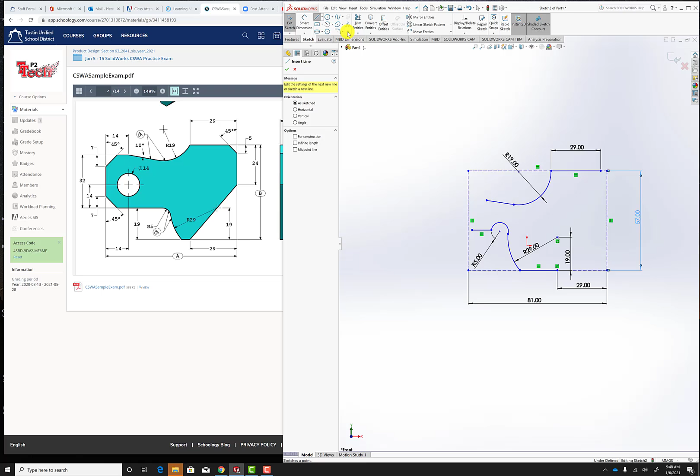Then I can start putting other points down. You'll notice that the diagonal line over here starts at 24 down. So if I put a point - points don't really matter where you put them - I can go ahead and put a point on the edge of the part, since that's as far as it goes.

And I'm going to dimension it from here to here, and it's supposed to be 24, so I'll say 24. Now I know that point is going to be able to take me from here to here, and that should be correct.

So now that also sets me up for the next one. I'm going to put another point in here and dimension it with 5 from the top. So I go 1, 2, and I'm going to drag it out here, and that's 5 from the top.

So now I can go ahead and make this line connect to that line, connect to that line. It's okay if I overlap my dashed center line, because it's only for construction, only for reference purposes. So I've got my right side kind of set up pretty well.

You'll notice that this particular arc and this one here don't really look alike. And there's something - there's this little symbol on all of the arcs. There's 1, there's 2, and actually there's only 2. This little circle with a line means that you have what is called a tangent relationship.

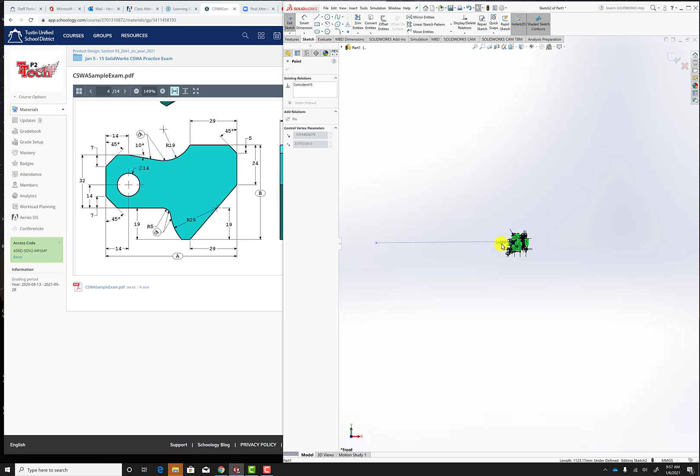All right, so let's see what else we need to do. I do notice that this thing looks a bit low, right? I can drag it up a little bit higher, and I don't know why this guy went all the way out this way. So I need to fix that, that line went nuts. Okay, all right, so that looks a little bit better.

This line is the one that needs to connect to here. All right, so let's continue. I'm going to take this line. I'm going to dimension it from here to here.

Oops, sorry about that. I need to go from here. Why isn't this working? Okay, from here to here, and that should be 32, which is over here on the left. So 32, and that didn't throw anything else off, so that's good. And we can click OK.

So now what I can do is connect this, hit the control key, and do merge. Oh, look at that. That looks pretty cool. So I can move on now to try and find out.

So the length, the distance between here and here is supposed to be 14. All right, and we did that. We have the distance. So now we have this other diagonal line that is going to be going between this one and this line over here, and it is supposed to be 45 degrees as well.

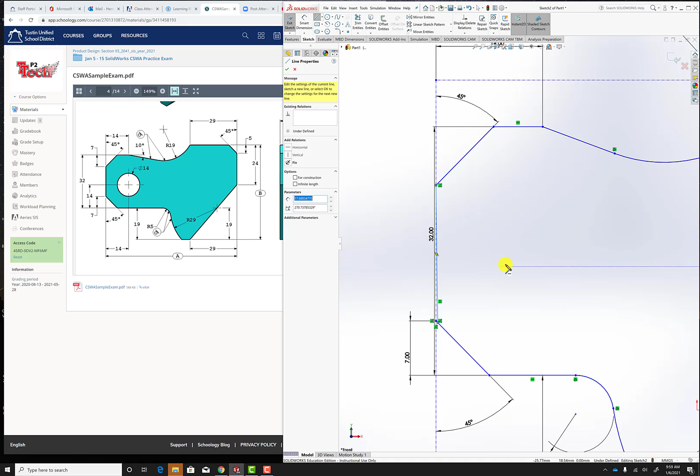So we can select it, get that one, select, go to Smart Dimension, select this, and put that at 45 degrees. And this is almost kind of finishing itself for us. Now we have one last line, and that's going to be this one connecting this one. Oops, I didn't actually connect it.

So if I want to connect them, I want it to be coincident. All right, so I have myself the part. It looks pretty darn good. Let me double check to make sure that I've got all of my dimensions correct.

It looks like I do. I've got my tangent relation. Remember this little circle symbol, and here it is as well, here it is as well, and here it is a third time. So let's do the circle. For the circle, it is 14 from the left and 14 from the bottom.

I'm going to start by just putting in a point, and then I can Smart Dimension that point. So from here to here is 14, and from here to here is 14 as well. Now I can go ahead and draw my circle, and it's 14 millimeters in diameter. So when I do this, I can put in a 7 for the radius. Looks like we're done.

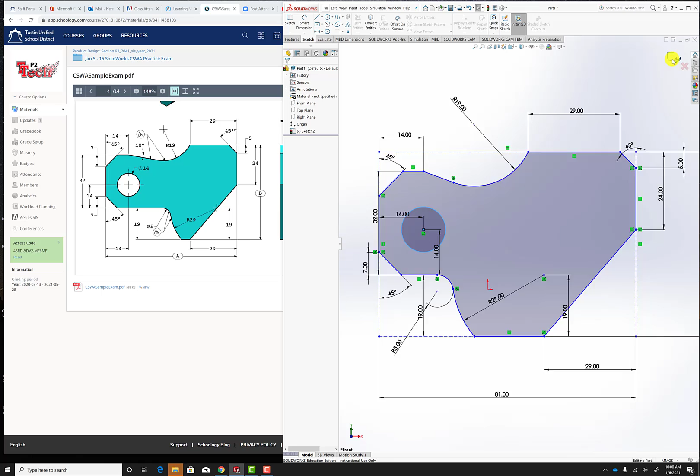So I click OK. Looks good. And I can go back and click on the sketch, and let's go to features. Before I do that, I want to double check what was C. C is 43, and C is the thickness, or the size of our extrusion, right?

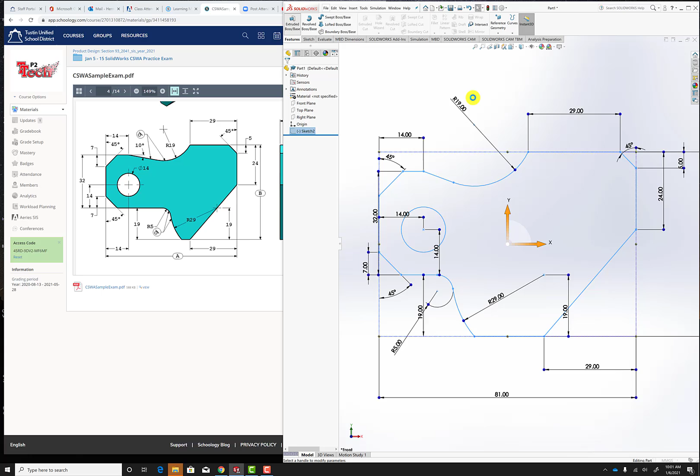So we'll go to features, extrude boss base, and we're going to put in 43, and we have ourselves our part. Cool. So if all things went well, now it tells me to build the part, and it says what is the overall mass of the part.

Okay, well first of all, we need to pick the material. You'll notice up here that the material is not specified. So I need to right click, edit material, and it'll give me a whole list of things. Now this tells me that it is steel, AISI 1020 steel. Okay, so let's look for 1020 steel.

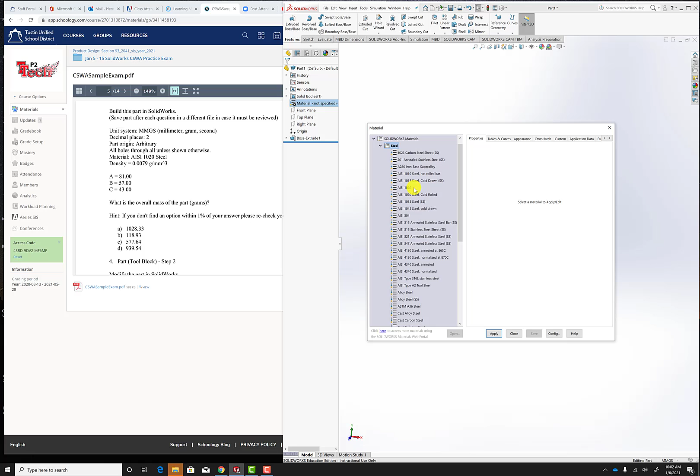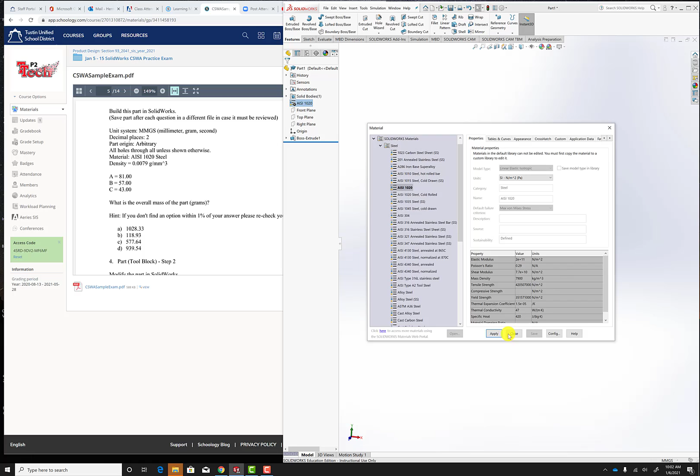I've got alloy steel. Let's see, what do I have? 1020. I have 1023 carbon steel. That's not 1020. Oh, there it is, AISI 1020. So I apply that. Oh, before I do that, let me just double check. The density is 0.0079 grams per cubic millimeter, mass density 7900. Yep, so that looks good. And I apply, close. So now I know that this material is steel.

How do I answer this question? What is the overall mass of the part? So now we go to evaluate, and we go to mass properties, and I'm going to double check. What is mass? It says mass right here, 1050.32.

And according to this, the closest thing that I have is 1028.33. So there is some discrepancy here, but how close is this answer? So I'm going to pull up my calculator on my phone and divide 1028 by 1050. I'm not going to worry about the 0.33 yet. So 1028 divided by 1050, then I multiply it by 100, and I get 98. So I'm within 2%. I'd say that's pretty darn close.

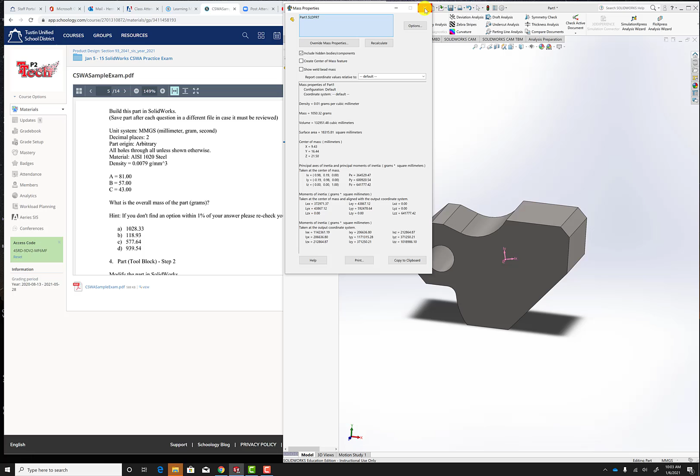I say that the answer is going to be A. Now let's go back, let's go to the answers. Looks like the answer is supposed to be D, 939. So something was wrong.

So I'm going back to the part to figure out what is wrong. It looks like all of my dimensions were correct, and I just found something. You'll notice that this radius here says 29. I didn't realize, I guess I was so eager to finish this, that this thing is really wide compared to this one. Well, the radius is off of this line, and right now I have it kind of in the middle of nowhere.

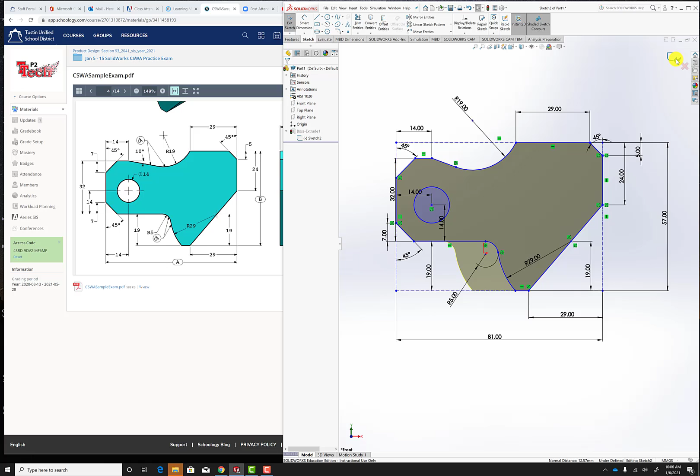So if I go back to editing my sketch and I select that dot, and I control-select that line, and I go to coincident, it moves it over. Look at that. It now looks almost exactly like the example, right?

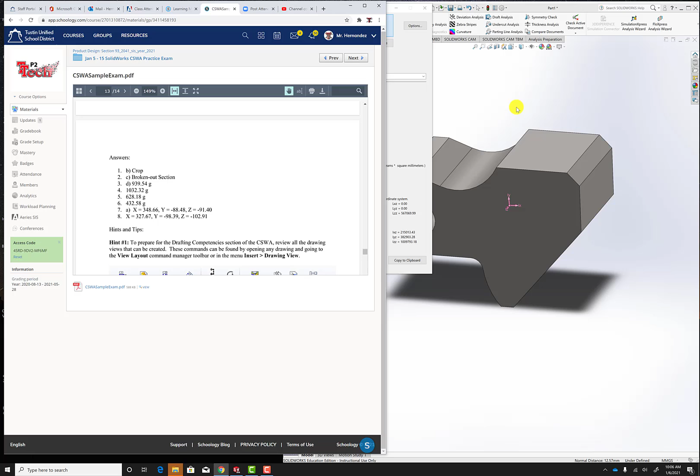So we go back to mass properties, and the mass is 942, and the answer for this was supposed to be 939.5. So we are really, really right on it, and that was the mistake. So one small mistake could have totally thrown me off.

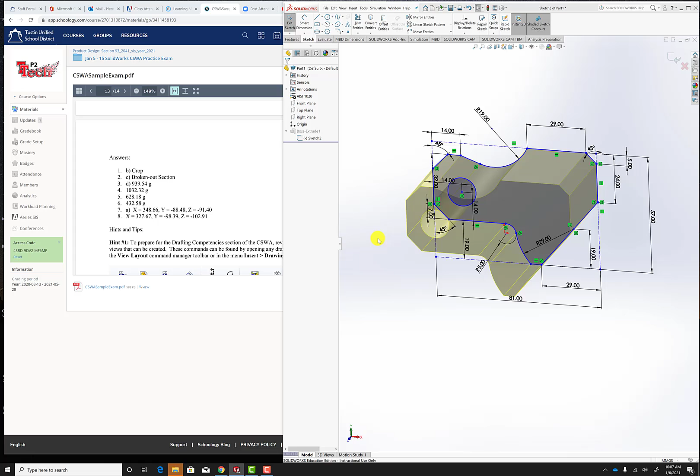All right, so give it a shot. Stop, pause, review this if you need to. Remember that once you have your part, you can always edit the sketch by right-clicking Edit Sketch, and you get everything back that way. Or you can go as far as deleting the boss feature, and then you're back to just the sketch where you can go ahead and edit that. And I can go right here and back to where we had it before. All right, good luck. Let me know if you have any questions.